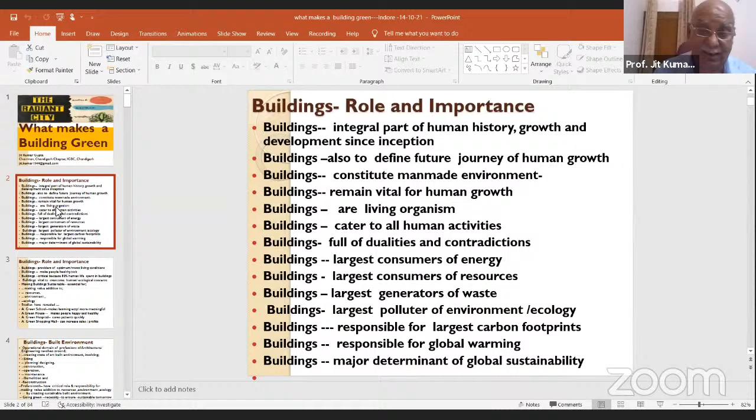So global sustainability will depend upon how we plan, design, construct, and maintain and operate our buildings. Buildings are responsible for making you happy, for making you unhappy, for making you healthy, for making you sick. And that's very important for a simple reason.

80% of total human life is spent within the 4 walls of a building. If you quantify, if you are living for 80 years, 64 years you will be within the 4 walls of a building. It may be your home, it may be your school, tomorrow may be your office, or entertainment, anywhere you go for shopping. 80% of human life is spent within buildings.

And in the time of COVID-19 and pandemics, this figure has already gone to more than 90%. So if you are spending 90% of your time within the 4 walls of a building, you can understand how the context of the building can be shaping human life. And Churchill categorically said: we construct the building, and then the building defines how the human beings are going to live.

Buildings remain vital for humanity, for ecology, for sustainability, and they are required for making value addition to resources, environment, and ecology. Studies have shown that a green school makes learning much easier and more meaningful. If you are living in a green house, you are making people happy, healthy, and more productive. A green hospital cures patients very quickly, and a green shopping mall leads to a lot of profit.

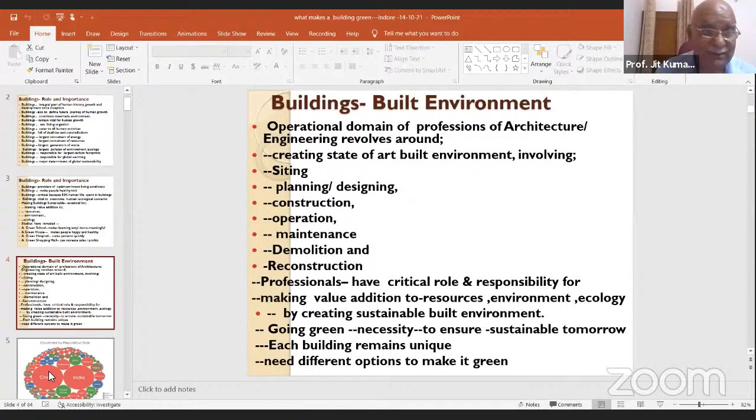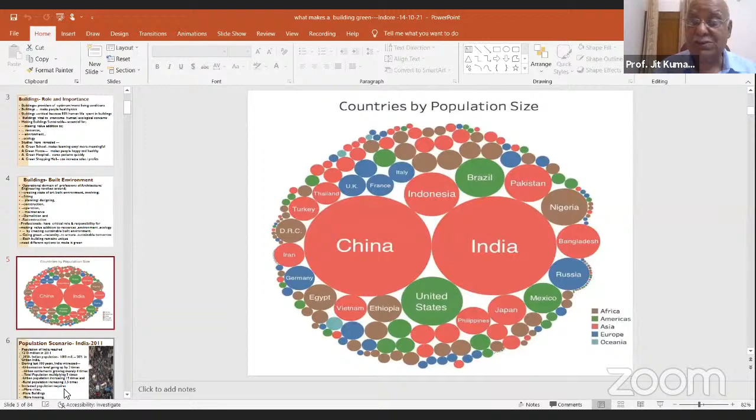There are 5 continents listed in terms of color: Africa, America, Asia, Europe, and Oceania. You can see how Asia is leading, shown in red. China and India jointly hold 37% of the total population of the world, and we have a lot of role and responsibility in making sure, because a lot of the built environment is going to come in India and China.

They are already coming. In India, we were 121 crore in the year 2011. We are going to be 160 crore by 2050, and we are going to be the most populated country in the world in the next 15 years. We'll take over China shortly. When more people are added, we need more cities, more buildings, more housing and education, healthcare, and other institutions.

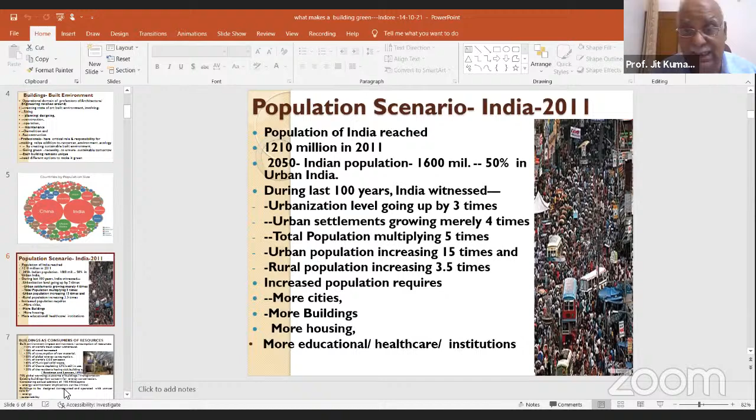But please understand, India is in a very difficult position. We have 2.4% of the land of the world, I'm repeating, 2.4% of the world's land, whereas how much population do we have? 17.7% of the population, that's 1/6 of the population we have, and that is the context. You have to value land, preserve and conserve it, and make sure land is treated as a natural gift and not a commodity for commercialization.

When I talked about buildings, I talked about their implications in terms of resourcing and environment. Let me explain what those implications are. 1/6 of the total water withdrawn on this earth is used in the making of a building. 1/4 of the wood harvested and 1/3 of the total raw material extracted on this planet are all used in building. Half of the energy consumed over the life cycle is done by the building, and 1/3 of the carbon emission can be attributed to the building itself.

40% of the municipal waste and half of the ozone depletion from chlorofluorocarbons are the outcome of how buildings are planned, designed, and air conditioned. 30% of the people visiting hospitals for consultation are primarily suffering from sick building syndrome, because they are not living in healthy buildings, and that's making them sick. So 70% of global warming is coming from two things: buildings and the way we travel.

If you are able to make our buildings rational and energy efficient, what we now call a zero energy building, and minimize transportation by using electrical or other fuel not based on fossil fuel, I think you have done your job. Looking at the projected growth of population, it has been concluded by McKinsey Global Institute in its research that India needs 700 to 900 million square meters of space.

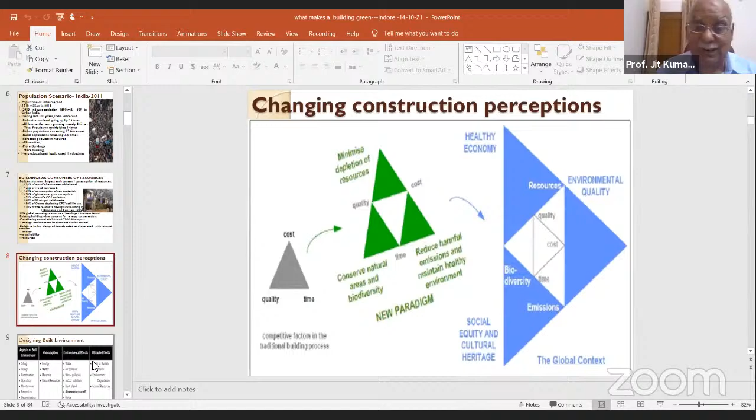But then it was thought that it is not cost, quality, and time which are the determinants of a building, because buildings are involved with resource consumption, biodiversity, and environment. Accordingly, buildings have to be seen in the larger context of minimizing depletion of resources, conserving biodiversity, and reducing harmful emissions. And then they said buildings don't have a local context, they have a global context. So accordingly, buildings have to be looked at in a much wider connotation, not confined to the site where they are located.

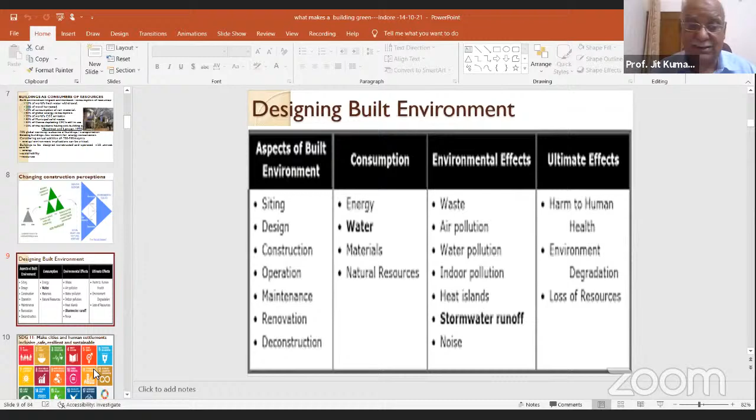So if you cumulatively look at what we have discussed so far, there are 7 stages in the life cycle of a building: siting, design, construction, operation, maintenance, renovation, and deconstruction. But what a building does, it goes on consuming. It consumes energy, water, material, and natural resources. The outcome is that it generates waste, pollutes air, pollutes water, indoor air, and creates heat islands. And cities are being flooded, and there's a lot of noise. And ultimately, what is the impact? It's human health, it's environmental degradation, and it's a loss of vital natural resources.

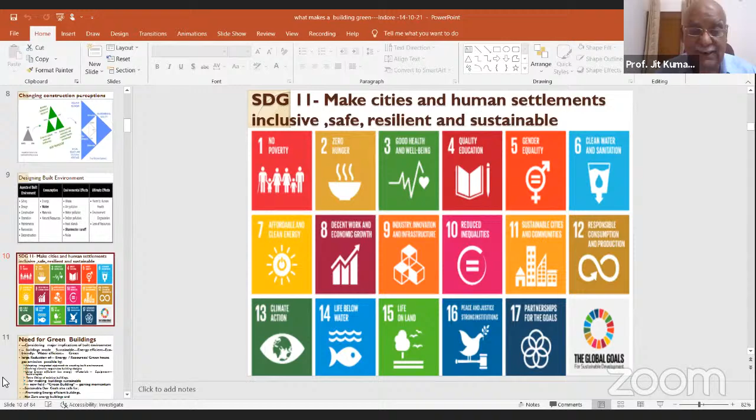We were now talking about energy efficient buildings. What does energy efficient building mean? Whatever energy is consumed by a building, you are trying to lower the consumption level. Buildings will continue to consume energy, come what may. That is the first stage, energy efficiency. Second is the zero energy building. That means whatever energy is being consumed by the building is also being produced by the building. And the third stage will be the energy positive building. That means the building will be producing more energy than it is consuming. That's the ultimate test of the buildings you will be designing and constructing.

So accordingly, it's possible to make buildings promoters of environment and ecology. And there are 4 options which we can use. Number 1, adopt an integrated approach to creating the built environment. Design your building evolving climate responsive or passive design. Thirdly, make your building energy efficient by using low energy material, equipment, and technology. And lastly, please retrofit your existing buildings. That remains very, very important.

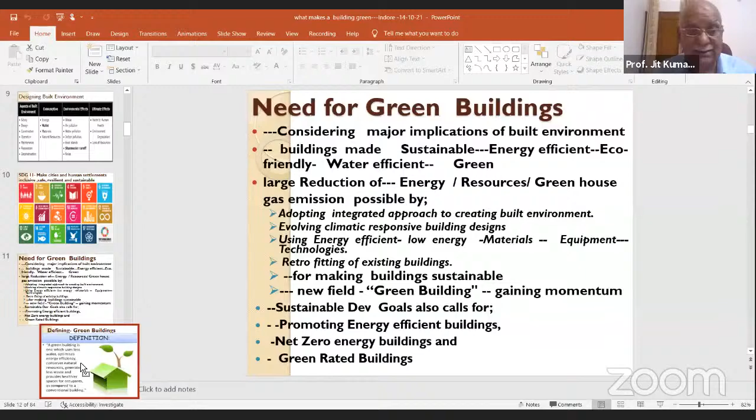So in order to address all these issues, to make buildings sustainable, the least consumers of energy and generators of waste, there is a new area which is emerging, the so-called green building. And the Sustainable Development Goals also say that we need to develop green buildings.

So what do we mean by a green building? I think we should understand what defines a green building, what constitutes a green building, and that remains the theme of my presentation. So a green building is one where you have 5 parameters listed here which make a building green. A green building uses less water. Number 1, water. Number 2, it optimizes energy efficiency. So second remains energy. Third, conserve natural resources.

So all resources which go into making all components which are used in the building. That is the third issue. Generate less waste. That means you are not going to have any waste. This is zero waste, the circular economy we're talking about. This is not a linear process, but a circular process which we are talking about.

And lastly, it makes healthier spaces for the occupants. Ultimately, buildings are being designed and constructed for people. It's not for us as architects. We're designing for people. If we're designing a hospital, a hospital is for the patient. If it's a school, it's for the children to learn. So all buildings are designed because there's going to be some kind of a user, and that user must have the best of the space.

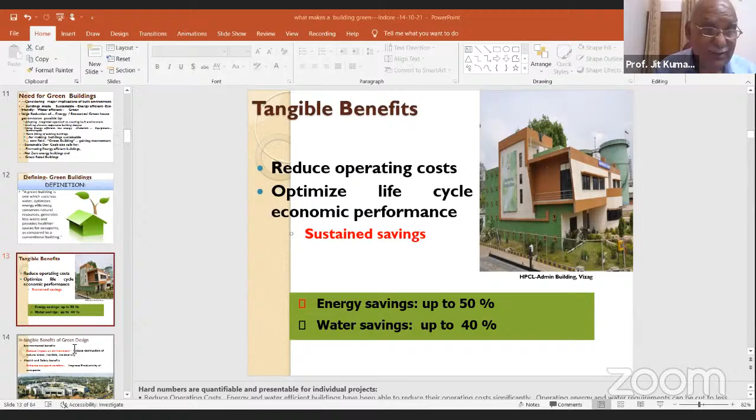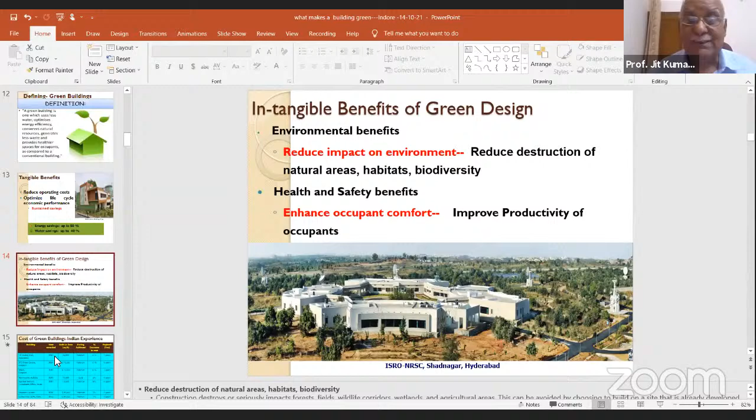Second is the intangible benefit. Intangible benefits are benefits which you can't quantify, but nevertheless they remain benefits. And that's what remains very, very important for us. They are more important because they reduce impact on the environment and they make people safe, healthier, and more productive. And that's very, very important.

Somebody asks, if you make a green building, is it going to be expensive? Surely, we would like to share with you what the cost would be. This is an actual case study. The first case study was the first building in the country which was platinum rated outside USA, rated by IGBC. It is the headquarters of the Indian Green Building Council at Hyderabad, and if you ever have an opportunity to visit Hyderabad, we'll make arrangements for you to visit that building. That building is now a zero energy building.

This building was designed by architect Karan Grover in the year 2003. It had a footprint of 20,000 square feet, it was platinum rated, and the cost was 18% more than normal. So where you would spend 100 rupees, you will be spending 118 rupees, for the simple reason that at that time most things were imported. Over a period of time, India has grown and most products are manufactured here, and accordingly the cost has been lowered considerably. And cost will depend upon how aware and conscious you are as an architect, and what strategies you adopt while designing a building to make it green.

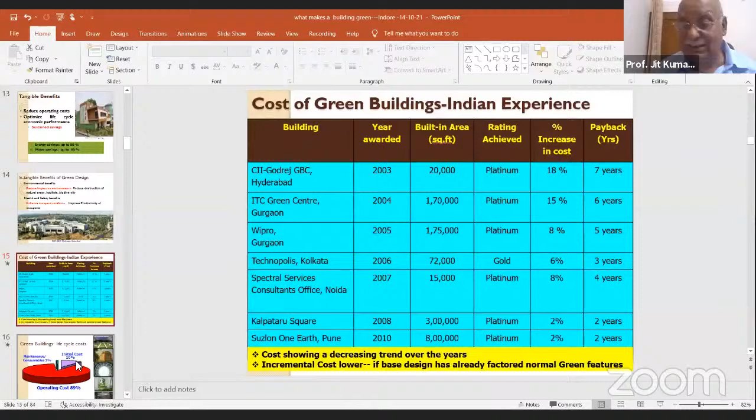And I can tell you, there cannot be a substitute for an architect. If you do a wrong job, no building can be made sustainable. Otherwise you are only doing firefighting; the main responsibility and role to make a building green shall rest with the architect, right in the beginning at the design level. And Suzlon One Earth, from 2010, with 8 lakh square feet of built up space, was platinum rated. Its cost was only 2% more: 102 rupees against 100, and that was recovered within 2 years.

When you look at the cost of the building, please don't look at the initial cost of the building. Look at the life cycle cost. On average, a building's initial cost is only 10%, whereas 90% of your money is spent on its maintenance, operation, and different activities over the rest of the period. So we are only looking at 10%, but we are not bothered about 90%. So when you look at the building holistically, and if you want to make it more cost effective, energy efficient, and responsive to the environment and ecology, please look at the life cycle cost.

And how you approach the green building, I think the best option will be to take a decision at the earliest level that you are going to have a green building. That's more important, rather than after the building is halfway done, then you think. I think that will be more costly, more expensive, and will require changes and demolition and reconstructing some of the parts. So if you have to make a building, please decide right in the beginning, before you start constructing, before you even start designing, that you are going to have one. You tell the client it's better to have a green building.

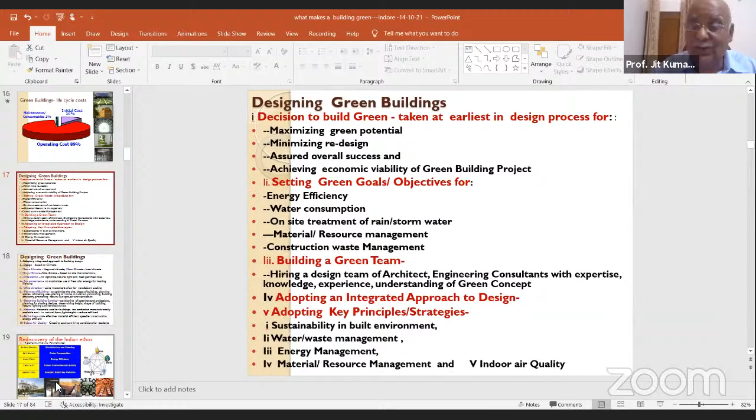And then you have to have an integrated approach to designing the building, for the reason that the building has to be considered holistically as one, not divided into roof, walls, or any services, or plumbing, or electricity, etc. They are all involved and integrated into this. So now, after you have looked at the building, let's go into how you approach as an architect, how to design a green building. The approach will have to be an integrated approach to building design. That means you will look at all the aspects of the building, even material, technologies, climate, sun movement, wind movement, planning and designing, and indoor air quality that will constitute the green building itself. So that will be looking holistically at the building.

So the first thing will be, you have to design based on climate, and please understand, climate comprises of what? Climate comprises of the solar radiation, number one. Number two, the humidity. There are many factors which go into making a climate. But please understand, there's a difference between climate and weather. Weather is one which changes every minute and every day. And climate is determined after studying, collecting data, analyzing, and averaging over a period of 30 years, when you come to the conclusion what the climate of the particular area is. So you will plan for climate, not for weather.

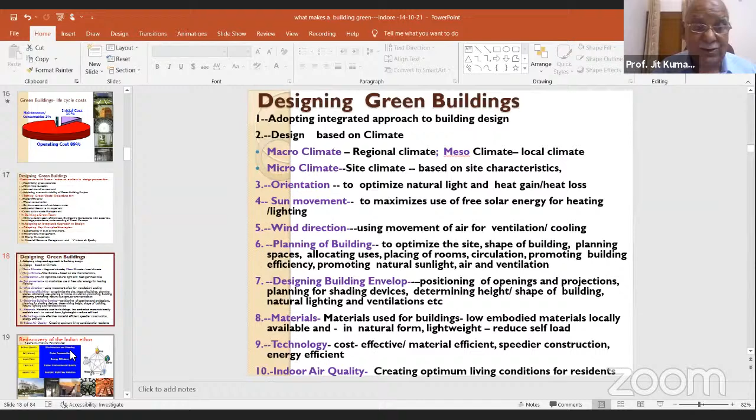And then the technology, which has to be cost effective, material efficient, and it should do the job in the quickest manner without wasting anything, while making sure that you have the best quality of construction. Then indoor air quality remains another area, where you want these living spaces to provide you the optimum comfort and optimum living condition, so that people become happy, healthy, and remain more productive.

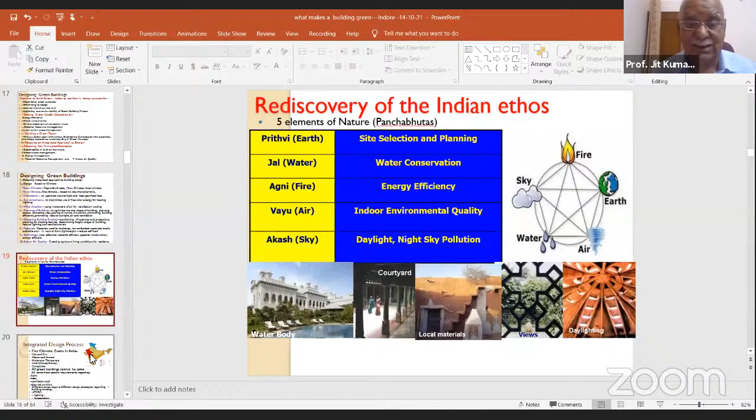So all green buildings are primarily and essentially based on what? Nature, making use of the natural environment. We know we are all made of Panch Bhuta, and those Panch Bhuta should also be used for the making of this universe and also the making of the building. It's Prithvi, Jal, Agni, Vayu, and Akash. They are the major determinants of the structure, construction, planning, and design of the building. Prithvi remains your site, Jal remains water conservation, Agni remains your energy efficiency, Vayu remains your indoor air quality, and Akash your daylight. All these five cumulatively construct this.

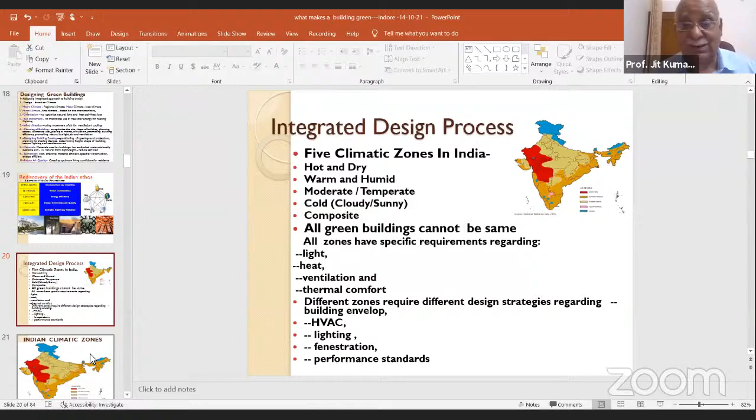But first we were talking about the climate, and let's understand there are 5 climatic zones: hot and dry, warm and humid, moderate, cold, and composite. So each climate zone has its own implication in terms of heat and humidity, and accordingly all buildings will have to be designed differently. There can't be a prototype building which can be constructed in Indore and tomorrow you construct the same building in Shimla or the Himalayas. No, they require different buildings. Or that building cannot be constructed in Bombay, because in Bombay the climate is totally different. So this is India. These are the 5 climate zones.

Red remains hot and dry. Then, along the coastal area, it's warm and humid because there's a sea and there's a lot of humidity. There are temperate areas like Pune and Bangalore, where temperature doesn't vary too much. Cold means the area where the temperature variation is very large and the temperature remains largely below the ambient level, so you need heating all the time. That's where Himachal, Jammu and Kashmir, Uttarakhand, and the northeastern states are located. And the rest of the country, where every 2 or 3 months the weather changes, the climate changes.

That means there is extreme hot, extreme cold. There is mild hotness and mild cold. Then there's a rainy season. All these 5 seasons are there, and those who don't fit into any system of climate are known as the composite climate zone.

So let's see how the heat is gained by a building. Ultimately, you are fighting with the heat. Either you are preserving the heat or you are trying to avoid the heat. And heat loss is 25% through your roof, 35% through your walls, 25% through windows and doors, and 15% remains your floor. So this is how, on an average, the total heat gain and heat loss is in the building.

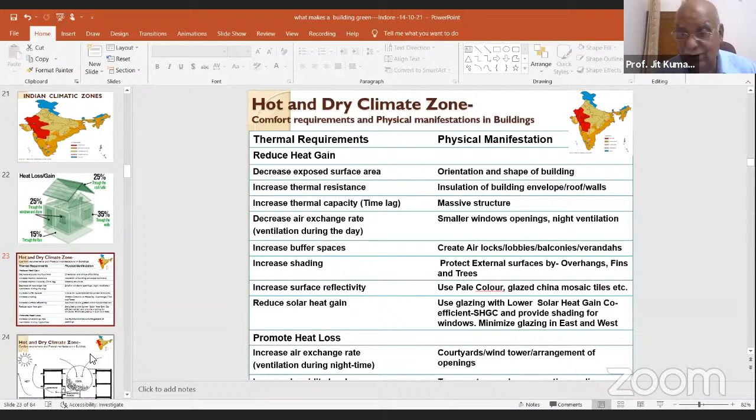Then reduce solar heat gain. So for whatever heat comes from your windows, you have to put glass which allows light to come in but doesn't allow the heat to come in. And if the heat is gained, then you make sure the heat is lost, and that's why you will have a courtyard, a wind tower, and those kinds of things which are available to you as design options for how you can keep things cool.

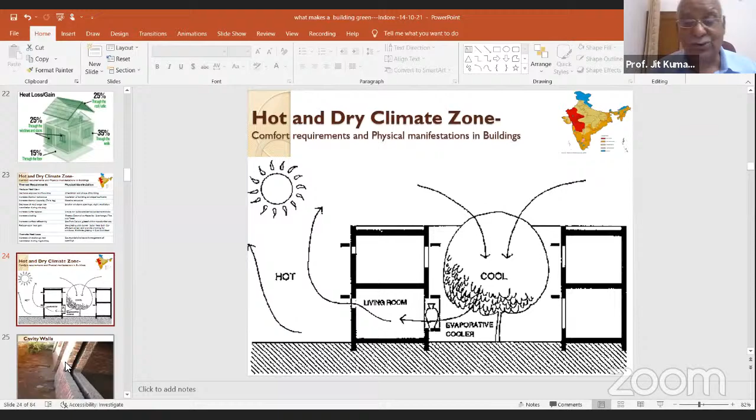So ultimately, in hot and dry areas, besides other things we are talking about, you can think of having courtyards. Courtyard remains the best option to make your house cool. And if you have a water body, if you have a tree inside, this will further cool it down, and you will find all the rooms adjoining that area will always have ambient temperature, where you don't need any kind of cooling at all.

You can have cavity walls. You can have the rat trap method of constructing walls, because air is a bad conductor of heat, so the air will not allow this. So either you have a cavity wall built in, or you will have a rat trap method.

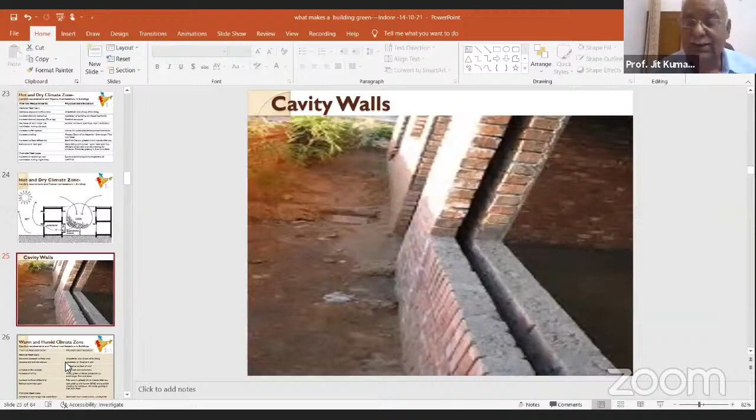Similarly, for warm humid, in addition to keeping the sun or heat away, you are trying to what? You are fighting with humidity, because there is a lot of humidity coming because you are close to the sea. And the only way of fighting the humidity is, number one, cross ventilation, or number two, a mechanical system dehumidifying the area.

There are dehumidifiers, mechanical systems which suck out and throw humidity. In addition to what you do in green building in hot regions, you are also fighting humidity with the help of cross ventilation.

Then comes moderate temperature zones. There, the option remains how to reduce heat gain and how to minimize heat loss.

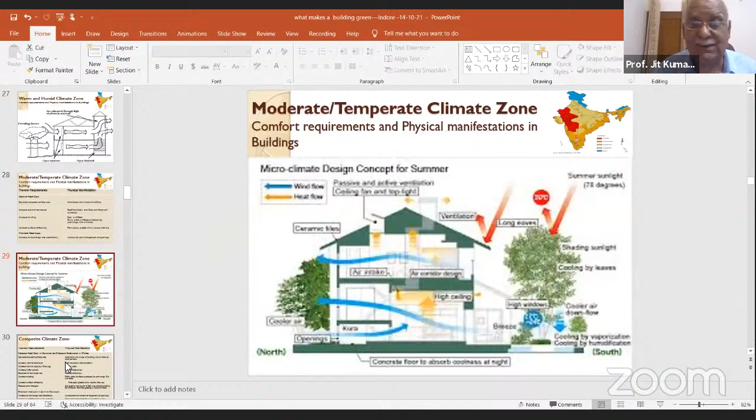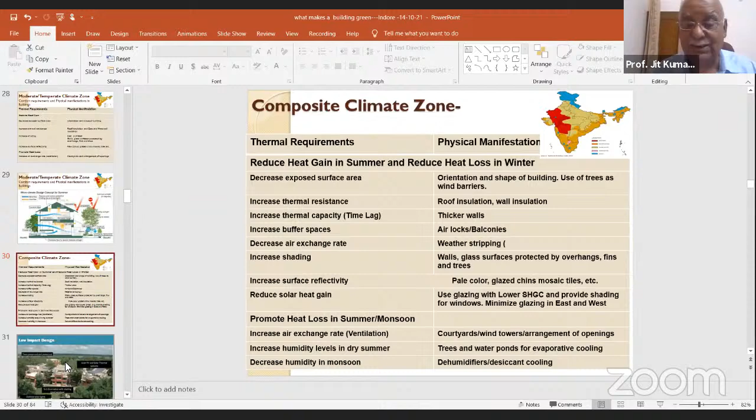We will look at how the sun behaves, how it moves, how you can bring the sun inside, and how you can cut off the sun during summer and winter. That remains this area.

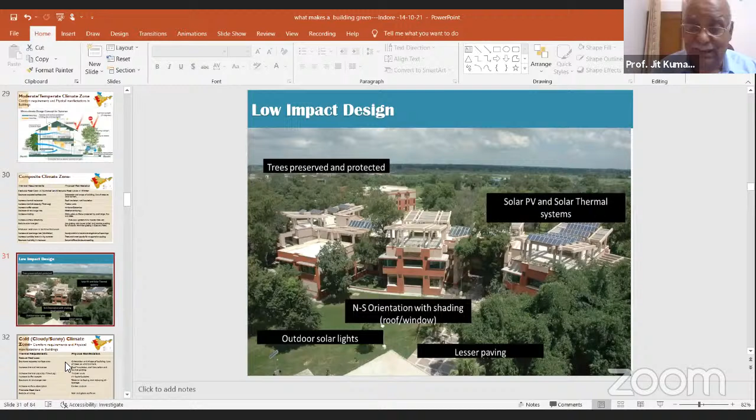This is IIT Kanpur, one of the green rated buildings. They preserved and protected all existing trees, then put solar PV panels on the roof, generating electricity while also shading the roof to keep it cool. Buildings are oriented north and south, with solar outdoor lights and minimum paving, so minimum heat island is created and temperatures don't rise.

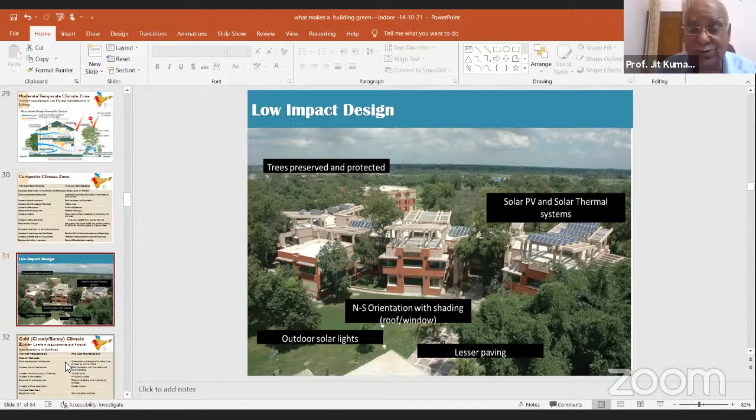So that's the ambit. But when you design a building in a cold climate, you have to be extra cautious. Earlier, we were trying to fight the heat and throw it out; here you have to bring the heat inside.

In hot climates, the best option was north-facing, where sun never comes in. But when you design in a hilly area, you never ever design a building on the northern side. All northern slopes should be banned in hill areas, because they never get sunlight. It would be criminal and unethical for an architect to design any building on northern slopes or facing north.

So you can think of east, west, and south, bringing all living areas into these three directions, but never in the northern direction. You can put non-living areas like storage or car garage in those negative areas.

So there you are following the system: you are not allowing the building to lose heat, and you are capturing heat all the time wherever it is available. Earlier we tried to have lighter colors to reflect heat; here we will do the opposite and use darker colors. All buildings will be painted dark so they can capture the sun's heat and transmit it to the building.

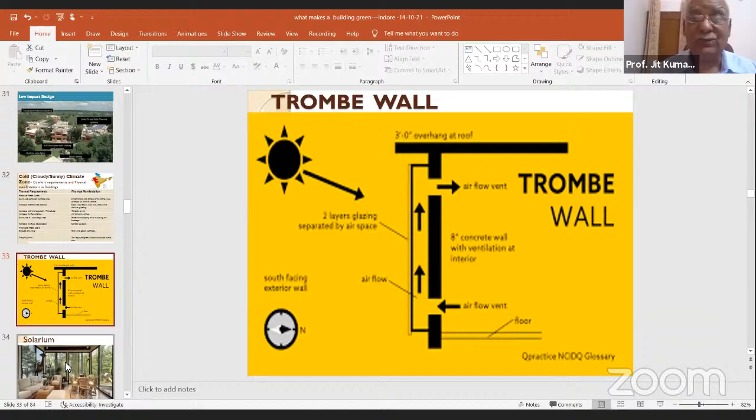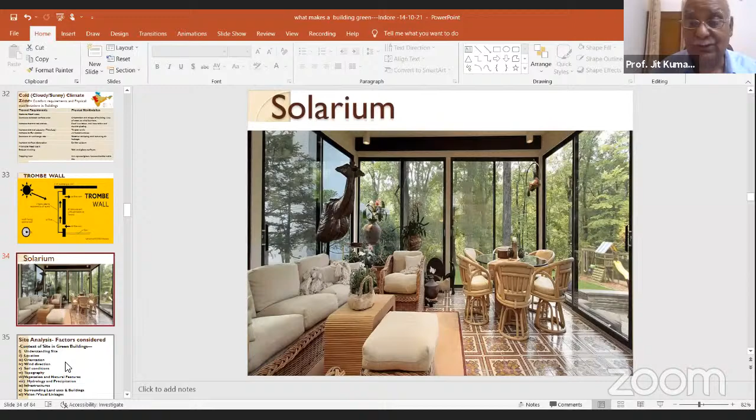So after going through the climatic zones, you look at the site. I think the site remains very, very important, and most things are lost because we don't understand the site.

As an architect, I would suggest that you must understand, look at the site, look at the right, left, top and bottom of the site. And if you understand the context of the site very well, I think you will never be able to do a wrong design.

So site context remains very, very important. There can't be a premeditated design solution. Of course, you are seeing so many things, what you are going to do is you will copy and try to paste on this. This is not the things which you needed.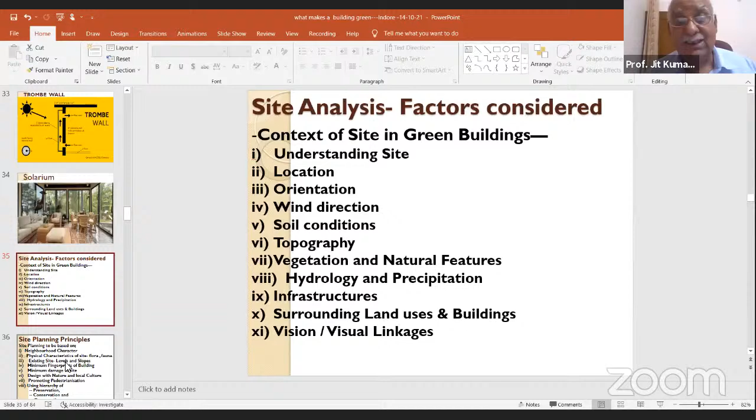In fact, if you look at the building, look at the site, shape, its location, its orientation, wind direction, the soil condition, the topography, the vegetation, the hydrology, the kind of infrastructure existing therein, and what is around that building, and what are the good linkages and what are the bad linkages, where you have to avoid and where you have to focus. I think you will be able to conclude in a very realistic and rational manner how your buildings are to be positioned, how the building are to be shaped, what will be the orientation of the building, where the spaces are going to be placed, and that all will come out after you have done the site study and site analysis. So please understand the role of site remains very, very critical and important, and all designs are a response to the site condition and site study, and not otherwise a premeditated study.

Then when you look at the site, what principle are you going to adopt while designing a building? You will see what are the surrounding characteristics. If there are tall buildings, you will not construct a smaller, low height building. You have to construct a tall building, because the tall buildings will be shading your building and they will not allow the air, light and ventilation to come in. But if there are buildings which are of lower height, you will not create a tower to block there. So you have to go by the general character which is prevailing, so that your building does fit in and it doesn't create a problem for others.

Then you look at the site, the flora and fauna. What are there? How many trees are there? Where are they located? What kind of vegetation is there? And please make sure that you don't have to cut any tree. That's the worst thing you can do. So all the vegetation which is existing, make sure you make optimum use of that. Particularly make sure no trees are cut.

If there is a tree which is coming within your built up area, if it's on the edge, shape your building around that tree itself. Secondly, if the tree comes within the building footprint, give it a courtyard, adjust it as a part of the building. You can do it. As an architect, you have enormous options, enormous ideas to make this tree an integral part of the design.

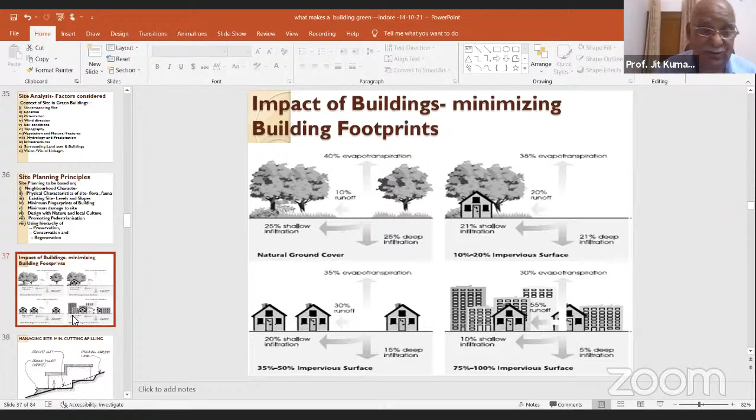When you are having a contoured site, your option shall be designing along the contour. If you have to do it across, make sure there is minimum cutting and filling and tampering with the site.

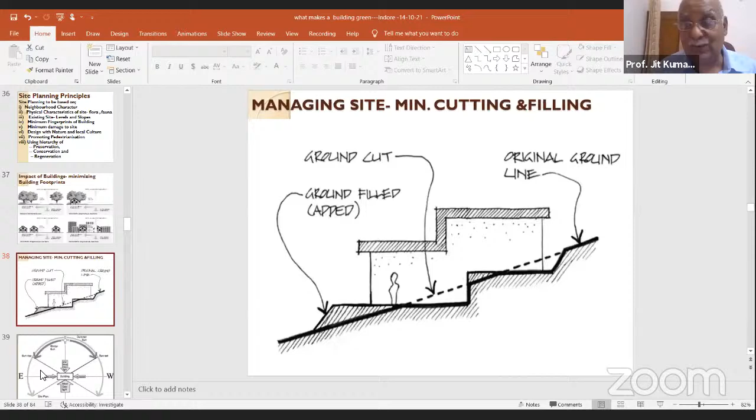Looking at orientation, how the sun moves - in summer the sun moves around the north, rises in the northeast, sets in the northwest, traveling around 240 to 260 degrees. That means the sun travels for a much longer time during the day, the days are longer, the altitude is higher, giving more heat and more light available during summer.

In winter, the sun is around the south, rises in the southeast and sets in the southwest, traveling only around 140 to 150 degrees. That's why the days are shorter, sun height is less, and the zone does not get very hot. So that is very important - you have to understand how the sun moves.

Sun never rises in the north, so you will never have direct sun coming from the north - of course there's northeast and northwest, but never direct sun from the north. So if you want uniform light throughout the day without direct sun coming in, put your openings on the north.

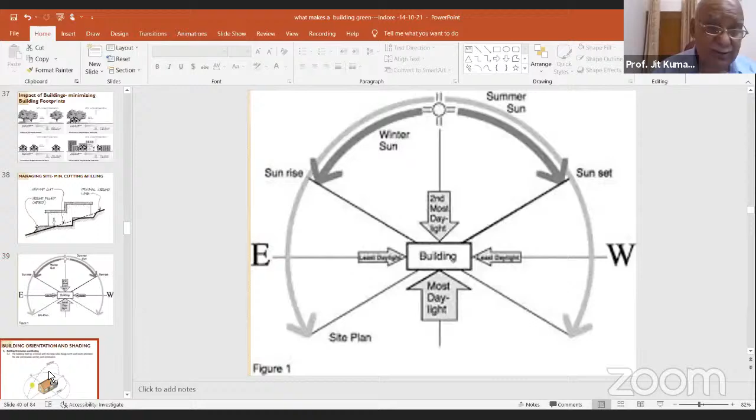As an architect, make sure you write down the positivity and negativity of each direction - north, south, east, and west - so you understand the context of these directions and how the sun moves, and which is the best option available to you. Once you understand and do that, it will be much easier, and your design will never fail on the altar of climate sustainability.

In hot areas, your longer axis should be east-west, with your building facing north and south, so you get the best benefit. You can see that in summer, the sun path is vertical.

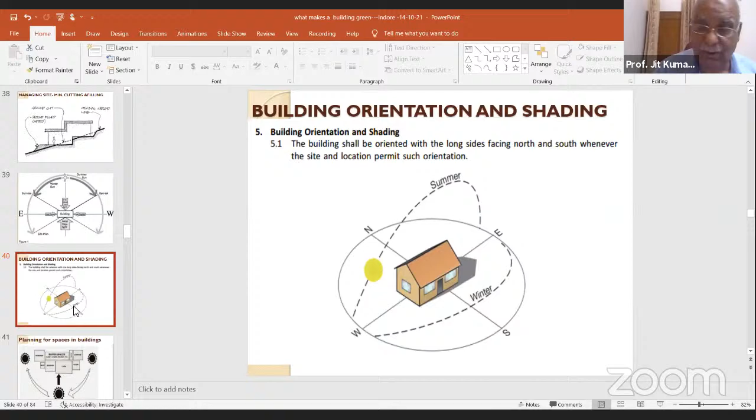In winter, it is much lower and horizontal. And that makes all the difference in the composite climate, how you make best use of the sun and how you avoid the sun. This is how, by designing, you can do that. I said on the south and southeast side, you have the best of your place: living, bedroom, kitchen and bath.

But on the western or north side, what could be a workshop or other kind of spaces which are non-livable. Ventilation remains another area. Cross ventilation is one which is very important. Please understand, windows and doors are not to be given in a very unplanned or haphazard manner. You have to understand how the air moves.

If you put one door there and the other door right opposite, what will happen? The air will straightway enter one place and go out, without providing ventilation in the rest of the area. Air is very straight, it can move directly wherever you provide a passage. But if you create an obstruction, it will find a way. So you have to make sure the windows and doors in a room are placed and positioned in such a manner that you have the optimum use of cross ventilation.

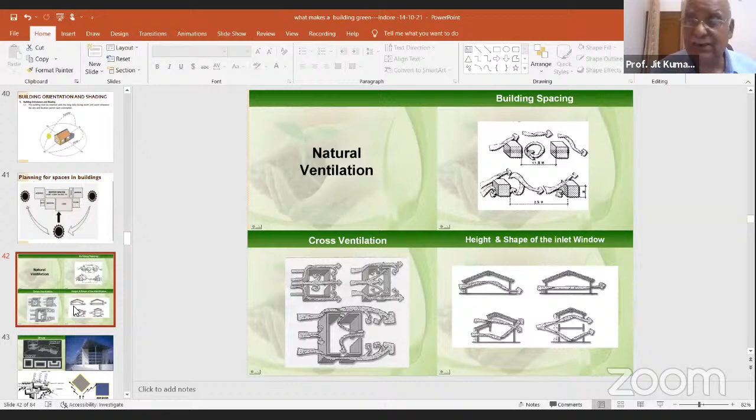And where the openings are, that remains very important. And where there are multiple buildings, how they have to be positioned so that one building does not stop the circulation of the air. Rather than putting them in one line, you can stagger them, and then you can make use of the air itself.

While designing the building, you can think of, as I said, having a minimum footprint. So you can make a building single story, 2-story, or 3-story. For example, if you make a single story building of 18 square meters, the wall area is 40 square meters. And if you make the building double story, it becomes only 27 square meters.

On one hand, you are reducing the area of the wall. That means you are spending less money on the construction of the building. Secondly, you have less area exposed to the sun. So if you make 3-story, you will find what could be the optimum combination to reduce the area of walls. The moment the area of the walls is reduced, your bricks, cement, mortar and labor component will go down, and the building will remain cost effective and space effective also.

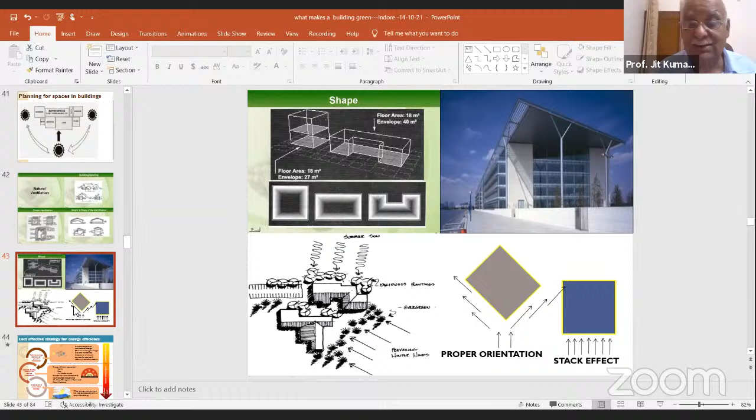And then how you cut off the sun in the southern direction, how you are orienting the building. If you put it straight in the face of the air, you will have a stack effect. And if there are no openings, there will be no air available. So how you make optimum use of the air movement, that's what you have to study very carefully and do it.

Then we come to energy, how you can save energy, how you can make the building energy efficient. Number one, you will have to design with climate, with the orientation, etc. Your design shall be climate responsive architectural design. Looking at the figure, we saw which climate zone it is and how the building is going to be positioned. So ultimately, you are trying to evolve a climate responsive design and an efficient building envelope, making optimum use.

Please understand whether you are having a single corridor or double corridor. That remains very, very important. A single corridor is most space inefficient because it takes a lot of circulation space. A double corridor remains very space efficient and circulation efficient, because you are dividing circulation into two spaces.

But the position of the room, its width and depth, will have to be such, and the windows positioned in such a manner, that the last corner of the room will also have daylight available to the extent possible. So you are depending minimally on artificial light. So ultimately you are using the sun and the air for cooling and heating the building envelope.

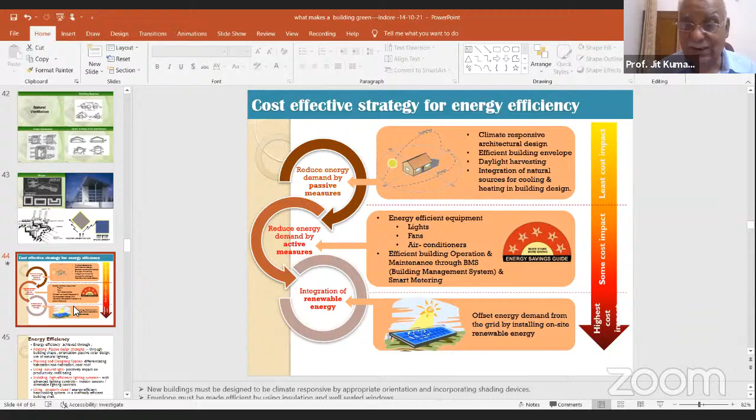So these are the three methods by which you can make a building energy efficient, zero energy, or energy positive. So passive design, planning and design of spaces, using natural light. You have a high efficiency lighting system. You have properly sized air conditioning systems. Then you define the colors of the building depending upon whether you're in a hot or cold region. Then you have high R values. That means you have maximum resistance to heat loss and heat gain.

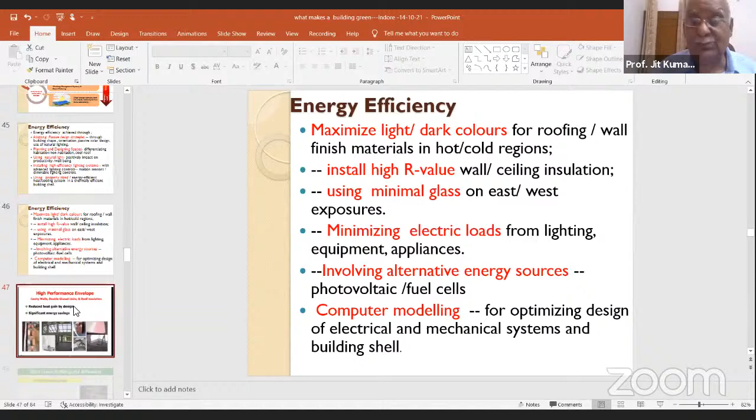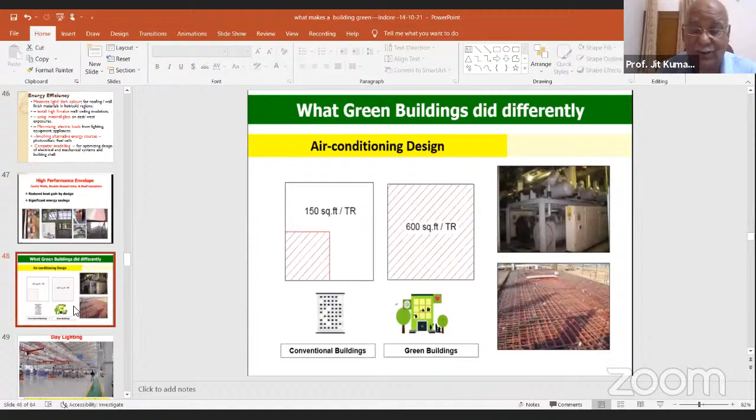Then glass: you are managing minimum glass on the western side. Then BIM, building information modeling, remains another option with you. So by your design, by your material, you can reduce this, and it has been found that where 1 ton of air conditioner will take care of 150 square feet, a green building will do the same job for 600 square feet. And Infosys has now done that with 1 ton; they are able to cool 1000 square feet of area. So that is the context of green building, and you can save this.

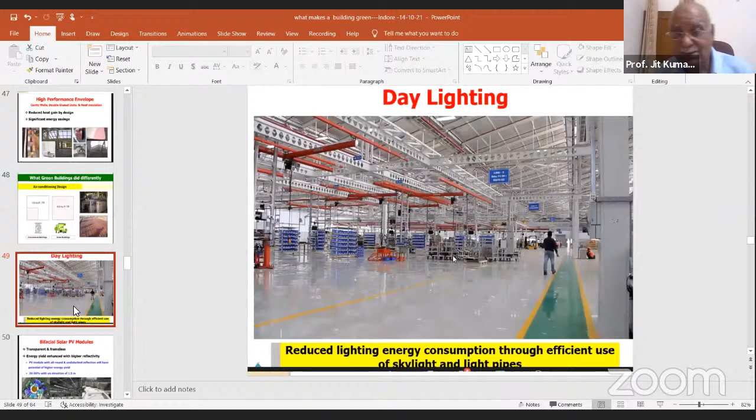Look at this industrial building. It's daylit; there's no artificial light. And this is all done by the north light itself. So now there are bifacial solar modules. That means there are solar panels which generate electricity when the heat falls on them, but they also generate electricity when heat is radiated from the roof itself. Both sides have faces, and they have more efficiency.

What you can do is, when you are in the southern area, cold area, or any area where you want to have photovoltaic cells, you can give a slanting roof on the top, so you don't need a superstructure. That way, those photovoltaic cells can be fixed right on the roof itself, and they will start generating electricity. You can build them as an integral part of this.

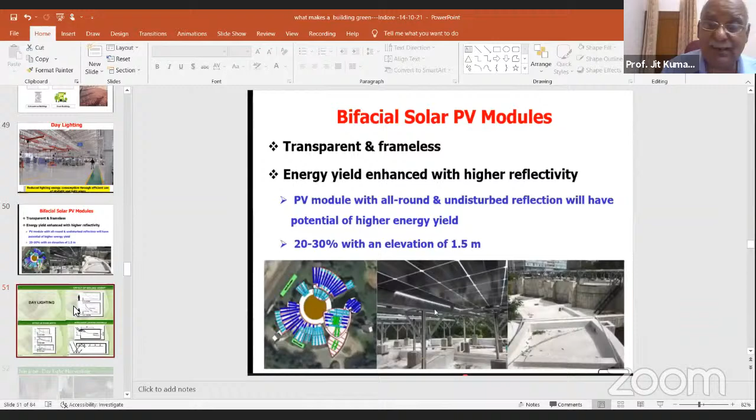Daylighting remains, of course, very important. For that, we have to consider the height of the room, the depth of the room, and the opening, so that each and every corner gets the advantage of natural light. And if there is a problem, then you use an intelligent method, reflecting the natural light by reflector into the lost corner. You can even do daylight harvesting. That means, like you harvest water, you can harvest the sun and light also.

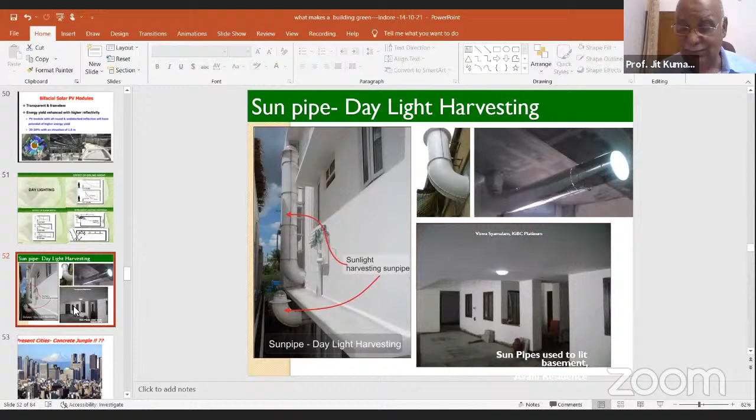Well, how is it done? These are pipes with a glass face, and they are all taken inside the room, and see, all the basements have been lit without any artificial light. And this is how it is done, by the system of daylight harvesting. So wherever you find that perpetual light will be required, you can use this mechanism of daylight harvesting.

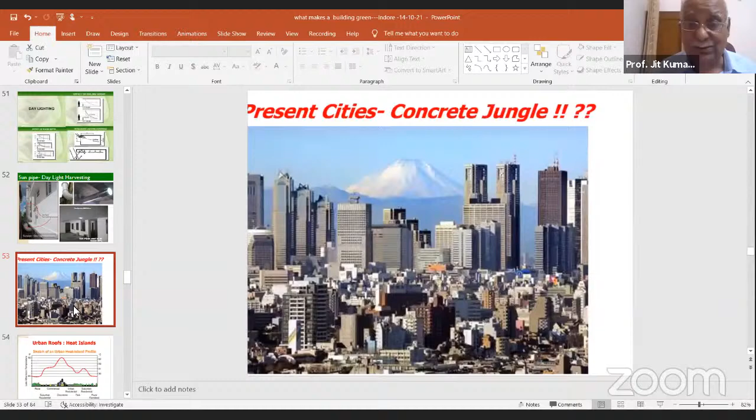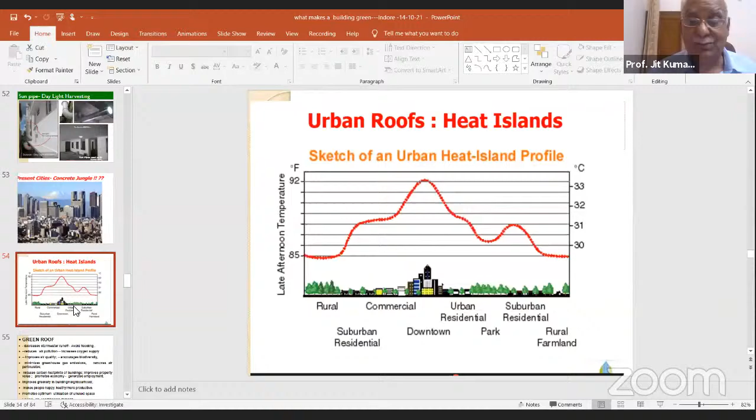So in fact, you can now look at the option of the roof being made a green roof, and the roof serves a lot of purposes. Where no green area is available, it can be added on the roof. This roof absorbs a lot of water.

It can stop flooding, it will absorb heat, it will not allow the heat to trickle down. You can have vegetation. So there are so many things which have now been experimented, and in Germany already 20% of the total roof area has been made green, because of the distinct advantages they have: they reduce runoff, they reduce air pollution, they improve air quality, they minimize greenhouse gas emission, they reduce the carbon footprint of the building, they promote greenery, particularly in areas which are very congested. It makes people healthy. It promotes optimum use of roof area, which is always very derelict and dirty.

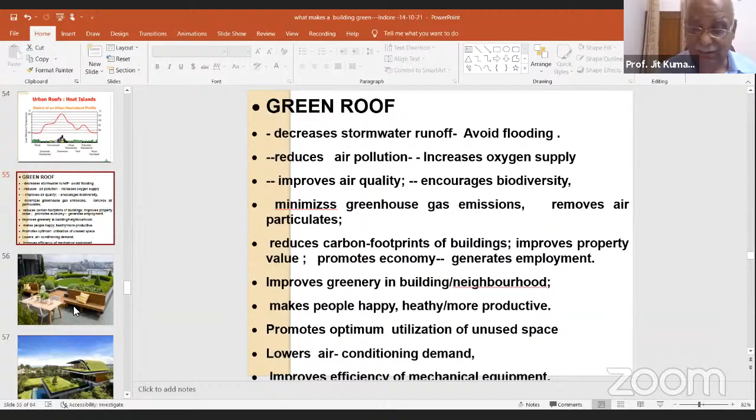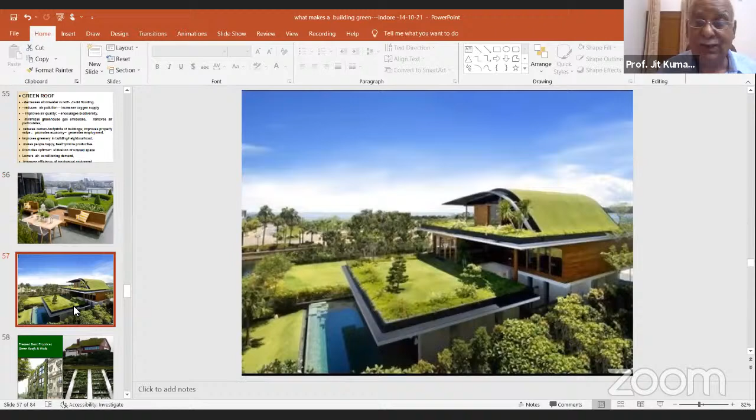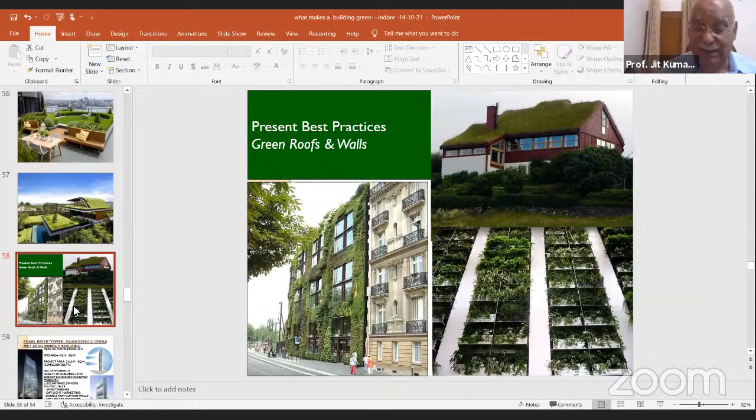So that means you are adding usable area within the building without expanding the building. Then you are lowering the air conditioning demand and promoting air conditioning efficiency. So this is one method, and this is another way. Green roofs are there. Of course, green roofs have their limitations. They have cost. But technologies are growing and ultimately green roofs will become one of the very nice options for making the building green. In many countries, green walls and green roofs are being made mandatory in order to cut down energy and make buildings energy efficient.

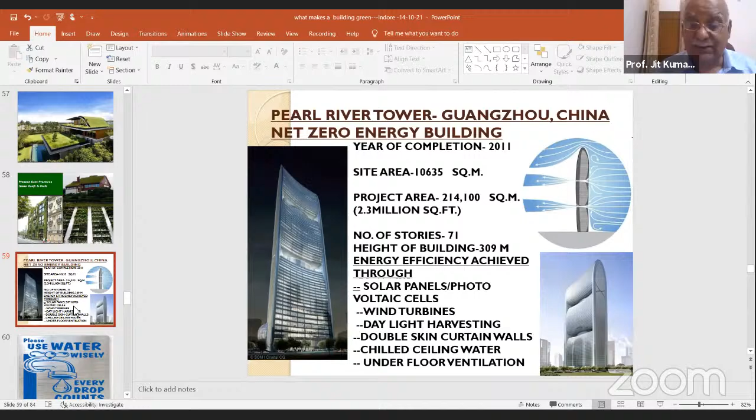What the architect has done is he divided this building into 3 parts. There are air spaces. When you move up, the velocity of air increases. He put the building right in the direction of the wind, and in the spaces which he created, he put wind turbines. So the wind turbines are moving all the time and generating electricity. Besides solar panels and photovoltaic cells, this system of wind turbines generating electricity has made the building a zero energy building.

Water remains another thing. How you do it, how you reduce water. You have to refuse the use of water, reduce water, recycle water, and reuse it. So instead of 3, there are now 4 R's dictating water efficiency. So what you are going to do is slow the flow.

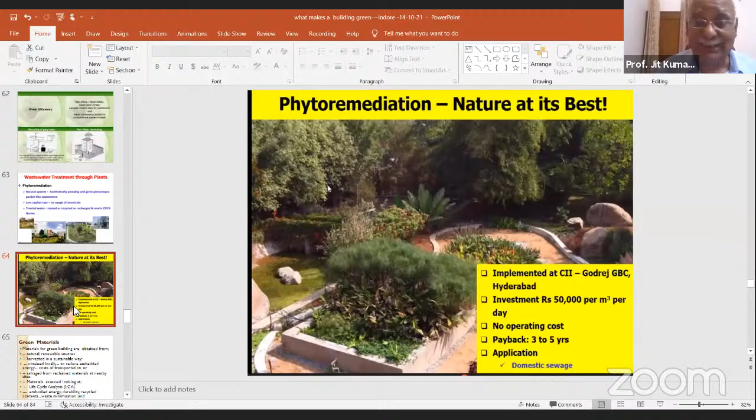But nevertheless, this is the context of water. And then we look at the material, and material remains, I think, very, very important. We have to obtain material from natural and renewable sources, and make sure we use the material which is available from all the existing buildings. If they are good, make use of them, and use local material in the natural form.

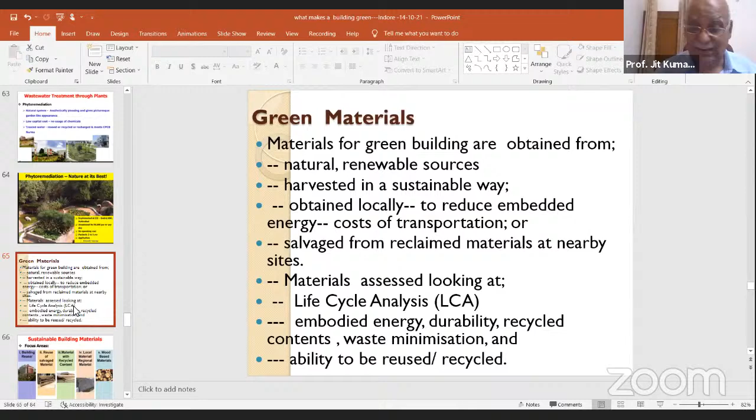And in Chandigarh, why is sustainability there? Because the majority of the building facades are brick, and they are allowed to remain there, and they don't need any care. So either you reuse the material available from existing buildings, or you salvage material and recycle it. God is the best architect, and he has given the best material appropriate for construction at the local level. Make use of those materials. Of course, you can reinvent, recycle, and technology available over time can do a great job to make sustainable buildings.

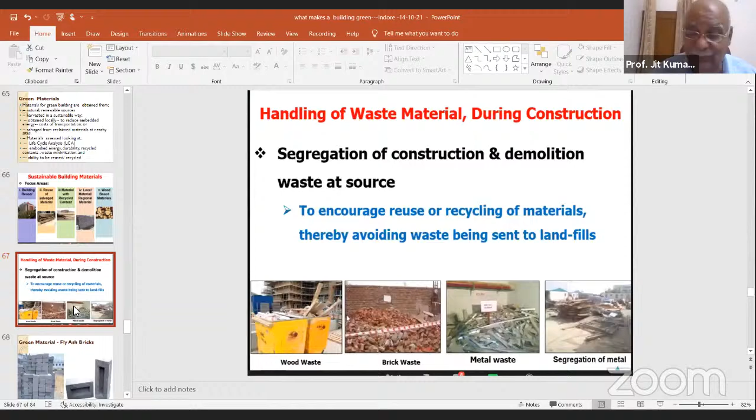Building construction and demolition waste becomes another opportunity to source good things which can be used, and it has been made mandatory now in many countries, like Canada. If you build a place where a building was already constructed, of all the demolition and construction waste, more than 70% you have to consume within the building in one shape or other, and only 30% is allowed to go. The moment you dump material outside, you will have to pay for that, and that becomes very, very expensive.

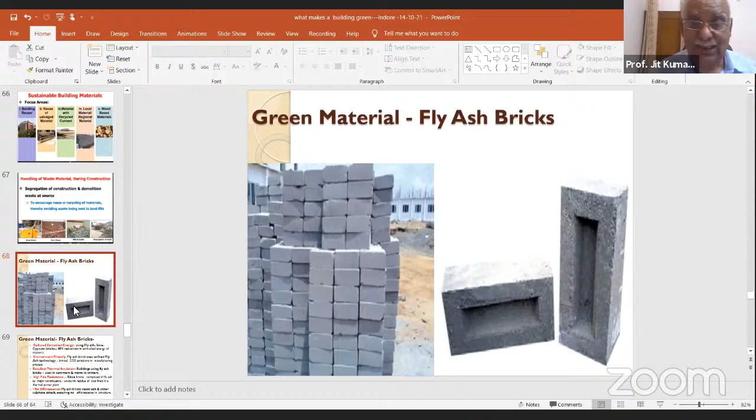Fly ash brick is made of ash generated in thermal plants, and India generates 70% of energy through burning coal. This brick has a great advantage because of reduced embodied energy. It is not burnt because it is already made of burnt material. It is environmentally friendly because there is no heating involved. It is excellent thermal insulation, neither allowing heat to be gained nor lost. It's highly fire resistant, and there is no efflorescence, the white patches you see on brick structures, because all the chemicals and salts are burnt.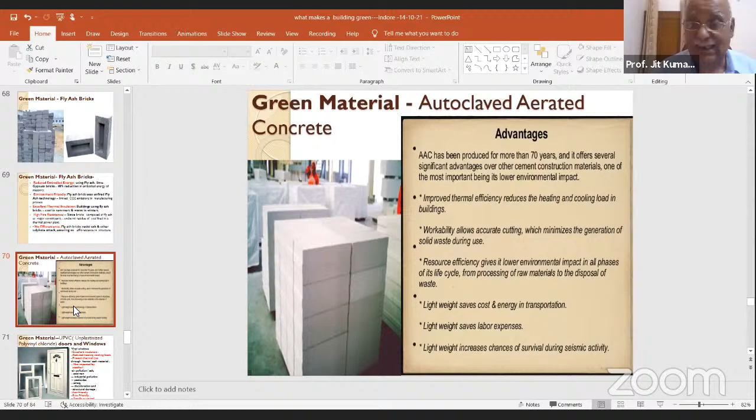Then UPVC remains another kind of option for doors and windows because they are excellent insulators. They don't allow heat to be lost, which we were talking about; 25% is lost through windows and doors from the cracks where they are joined. So it doesn't allow that because it's tight. It doesn't require any maintenance. It is not impacted by acid rain or industrial pollution, and you don't require any kind of maintenance by painting, or there is any structural damage. So that is very, very cost effective.

And bamboo is one option. You must all be knowing. Bamboo is known to be the steel of the 21st century, where bamboo steel is being used. Bamboo remains for its structural advantage. It's lightweight, cost effective, durable. It's very, very fast growing. Even there are varieties which grow 4 feet in a day. It's simple to design, reduces waste, and it sucks in carbon dioxide to a large extent,

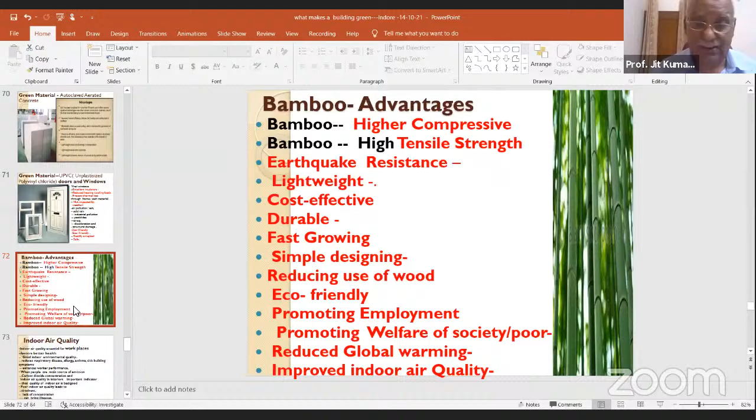and it promotes indoor air quality, and that's very, very important for making people happy and healthy. Indoor air quality remains important for people to remain healthy, to remove tiredness, to avoid loss of concentration, and to avoid any kind of illness. We are all exhaling carbon dioxide and inhaling oxygen. So if the room is not supplied with fresh air, what will happen? You will exhaust all oxygen and you will be inhaling carbon dioxide again, and then your entire metabolism will go wrong, and you will have headache and so many other problems. That's why you need fresh air all the time.

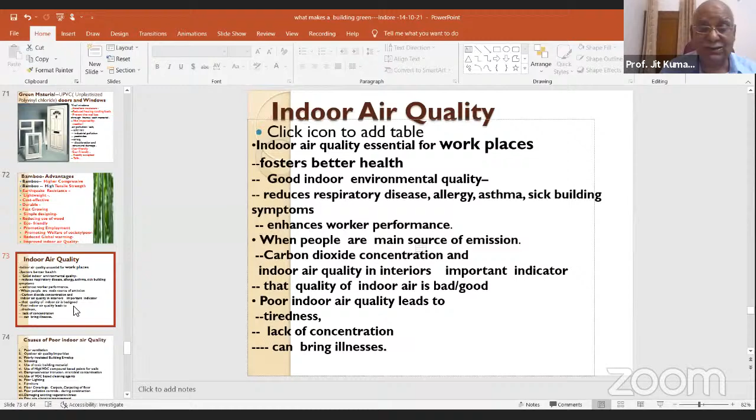So ultimately, poor indoor air quality is because of poor ventilation and outdoor impurities coming in. Then somebody smoking, then the materials you use inside for painting and flooring. Please make sure that you don't use material which is based on chemicals. What is happening? The chemicals are getting absorbed in the air, and you are inhaling them. So you should have products which have low volatile organic compounds, and make sure that there is no carpet put in the room.

You think carpets are doing a great job. Carpets are, I think, the worst kind of thing. The dust, the microbes which go into them, they cannot be cleaned. So you have to be very clear, and please don't use phenyl for cleaning your room. And for all the wood you are using in the room, make sure that no chemical is used for varnishing or polishing. So this is what remains very important.

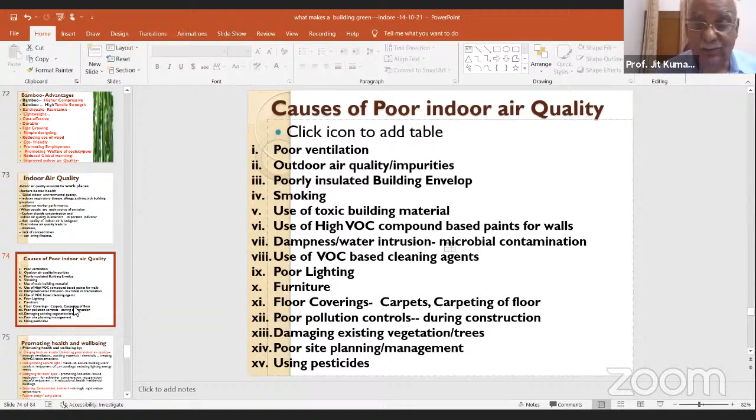We are not looking at indoor air quality, but it is the one which remains important in addition to air, light, and ventilation. That is what determines the quality of living, and you have to make sure that the people inside have natural views, light, ventilation, and fresh air coming in all the time. So that remains the ambit. So that is what we say: bring fresh air, incorporate natural light, design for the ear, that means no noise should be there. Then environmental comforts, and you use plants to bring this in.

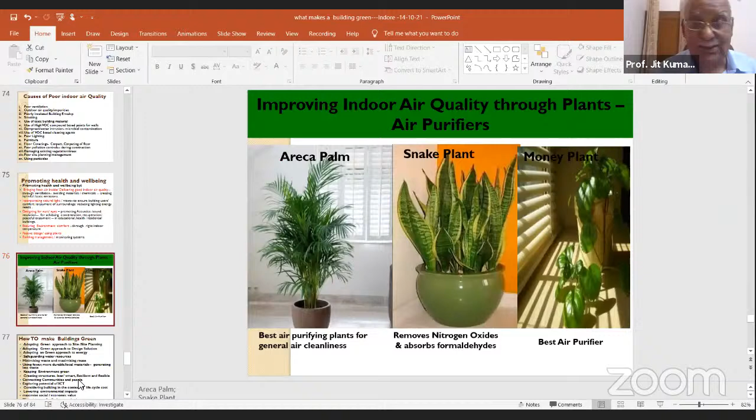Plants I'm suggesting: areca palm, snake plant, and money plant. These are indoor plants. They don't cost anything. You can put them in your room. What they do, they suck in carbon dioxide and leave oxygen. So you will have fresh air. Put them in your classroom, your offices, your home; you will find there are so many plants which you can use for this. So this is the total ambit of green building. I can't explain all of it; this is a brief of what I've tried to explain.

But ultimately, how do you say whether a building is a green building or not? It is done through a rating system, and rating systems are designed by different organizations. There is the Indian Green Building Council. You have a student chapter, so you know about this. What does IGBC do? IGBC frames policies and programs and creates awareness among students and professionals to make sure that they all design green buildings.

So more than 90% of the total green built-up space is rated by IGBC, and IGBC has already gone to the level of 7.86 billion square feet. That means 786 crore square feet of space is already under the ambit of IGBC, which remains the pioneer, in addition to GRIHA, GEM and the USGBC.

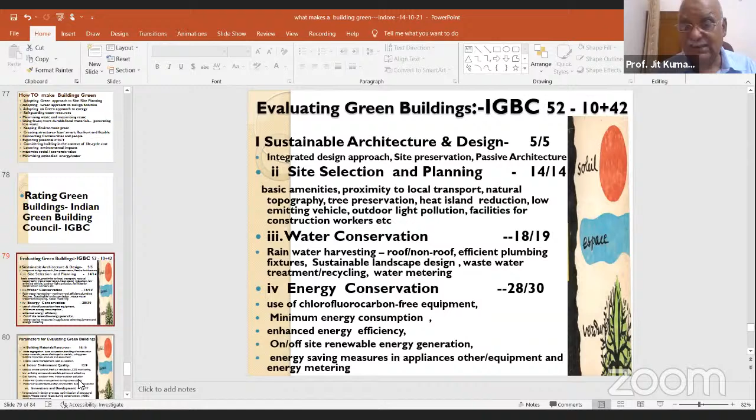USGBC started this in collaboration with IGBC, and IGBC has grown over a period of time independently. There are 29 rating systems available, and all of these are basically looking at 7 factors: sustainable architectural design, site selection, water conservation, energy conservation, building material, indoor air quality, and innovation and development.

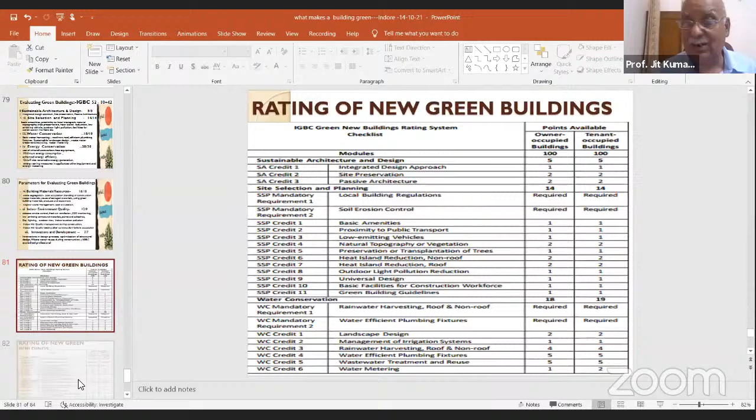All these are rated and defined into 52 parameters. 10 are compulsory and 42 are optional, but all have weightage, and you have to comply to that, and then you are given marks, and you see where you stand.

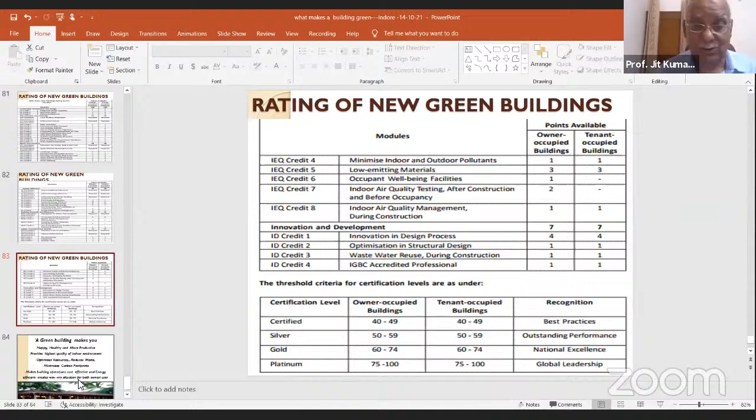If you score between 40 to 49, you get best practices certified building. 50 to 59, you get silver, 60 to 74 is gold, and above 75, you are platinum.

But looking at the entire context, I think green building is one which makes you happy, healthy, more productive, provides highest quality of indoor environment, optimizes resources, reduces waste, minimizes carbon footprints, and makes building operations cost effective and energy efficient.

And it is never ever a damaging thing. It creates a win-win situation or positivity for both owner and user, for individual, community, city, state and nation and the planet. So green building remains most relevant and most important.

And in fact, a green building can't be a slogan. It should be made as a part of the professional practice, professional ethics and professional thinking, that whatever you will do, you will design green.

By doing that kind of thing, it's not that you are doing any kind of charity or service. In fact, you are doing much more. You are trying to serve the cause of humanity, because you are promoting the ecology, environment, sustainability of this planet Earth, for which this entire world is trying.

So architects and engineers, you both have a very important role cast for you, and you are relevant, you were relevant, you will remain relevant. And I can tell you, no sustainability on this planet Earth can be achieved till architects make this an integral part of their work, and you are able to create green buildings. So the future will depend upon you.

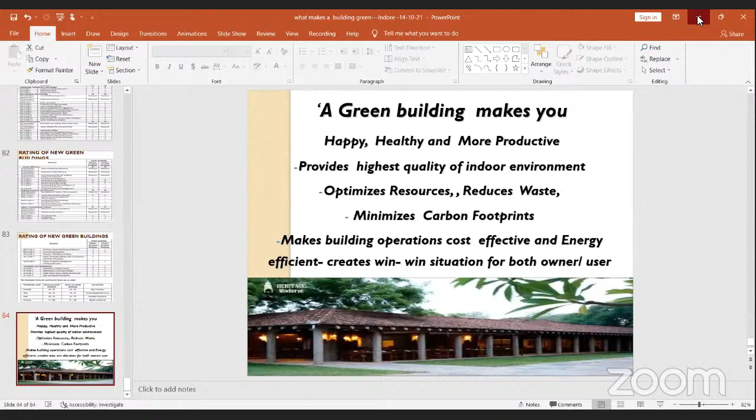Sir, my question is related to - actually I am a civil engineer with masters in environmental engineering. Sir, I just want to ask, is there any course or certificate course in GRIHA or IGBC for such profile engineers so that we can improve our profile in environmental audit and such type of professions, sir? Thank you.

But since you yourself are an engineer and know everything, what I'll suggest is go on the IGBC site, see the Accredited Professional program, download those materials, see the old papers, prepare yourself since you already know most of the things, and then appear for the online exam. Once you get through that, you will be given a certificate of Accredited Professional.

That means you become like a chartered accountant. So this is another career option which I'd suggest to students - after graduation they can take this up, and then you are authorized to audit, advise, aid, and assist people who want to build green buildings. You can guide them, help them, get involved, and in the rating system, 1 mark is also given if the company employs an Accredited Professional in the planning, designing, and construction of that building. So the career option is there.